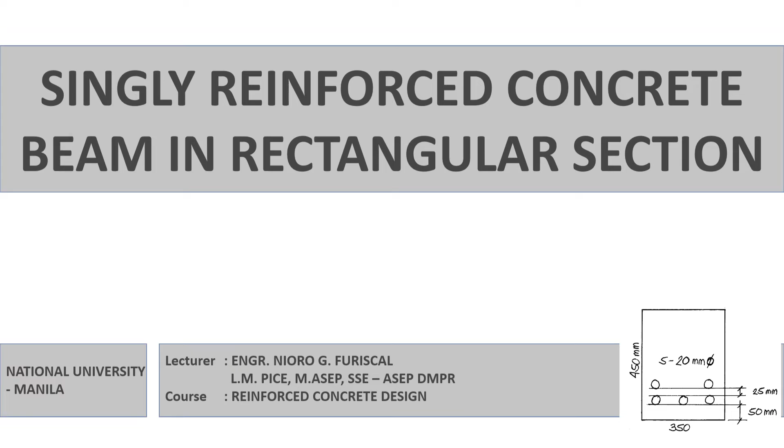Okay, so this time we will try to apply all of the codes that were discussed before this video lecture, regarding the singly reinforced concrete beam. Today we are going to demonstrate how to apply those pertinent codes in a rectangular section. Okay, so let's get ready.

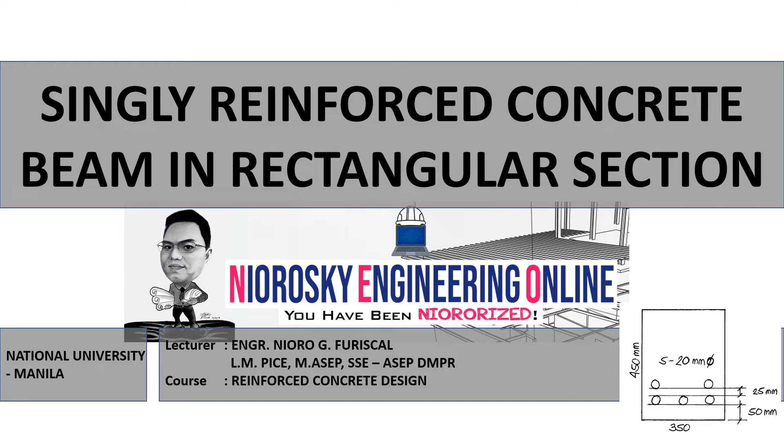So here is a given. We have a beam width, let's say B is 350 mm. And then we have 450 mm to be our H or total height. Notice that the gap between two layers of reinforcement is 25 mm.

Next time around as I discuss this, I'll try to introduce the code behind why I decided to use 25 mm, because there is a minimum requirement. But for the meantime, let us appreciate that it is given.

Now, also, the distance between the rebar up to the nearest surface of the concrete, free from reinforcement, is what you call concrete cover. So the concrete cover used is 50 mm.

So why is it called concrete cover? Because it's free from rebar, so that distance is the concrete cover. So when we say CC, it means concrete cover, or you can call it clear cover.

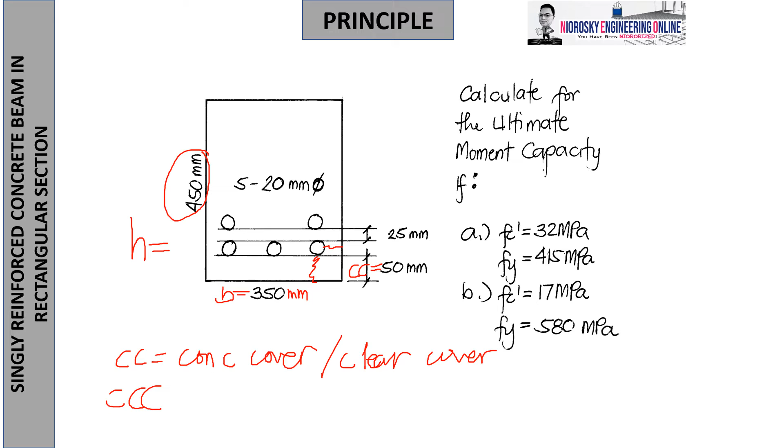Okay, now we are to find the ultimate moment capacity. That's the question. If, let's say, letter A, we have this set of FC prime and Fy. And letter B, what if FC prime and Fy is given differently here?

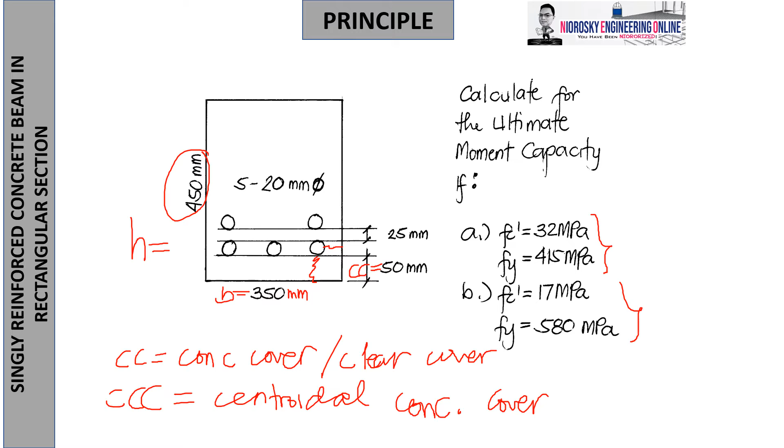Okay, so based on what we discussed in the code before, let's compute what we call beta sub 1, which is dependent on FC prime. Recall that beta sub 1 is dependent on your FC prime. If that exceeds 28, then you have to calculate it.

Just like what happened in letter A, the formula goes like this. I think the viewers or learners should review the video lecture that I prepared before this discussion, including flexural analysis of reinforced concrete beam as well as the reduction factor calculation under flexure. Therefore, we will arrive at this formula.

Since FC prime for letter A is 32 megapascal, meaning you are above 28, the code says to use this formula. So supplying it, you will get beta sub 1 of 23 over 28.

As much as possible, beta sub 1 should be interpreted as a fraction first, so as to preserve what we call accuracy and precision of the calculation. Much better is the accuracy.

So therefore, when our FC prime is 17 megapascal, since it does not exceed 28 as the code suggests and recommends, beta 1 should be 0.85 immediately. Okay, so it is under the code already discussed in the past video lecture.

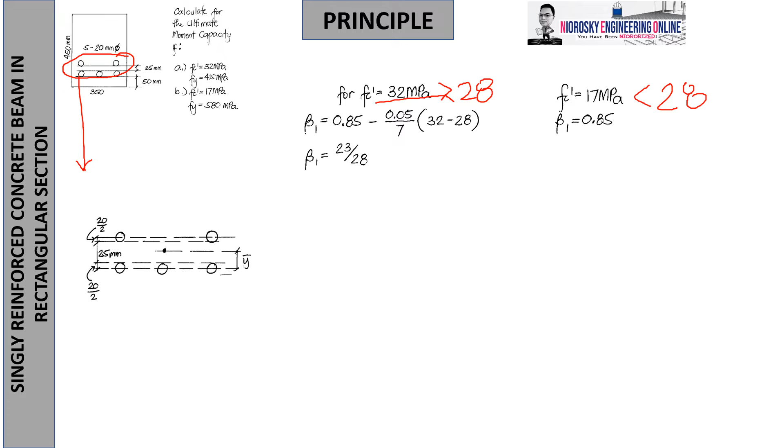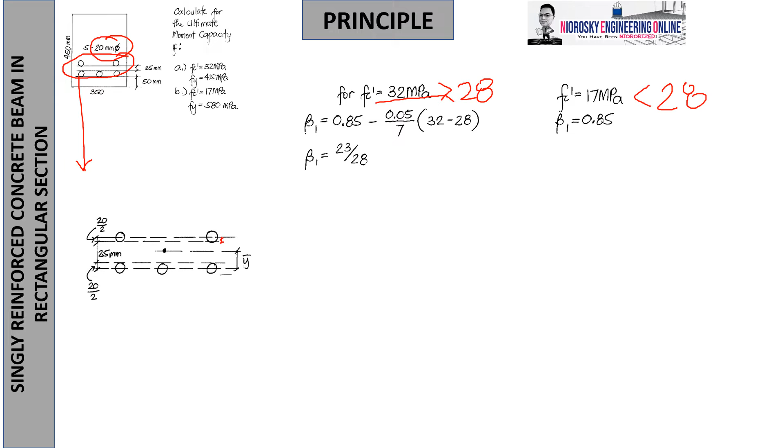And if you notice, since it's halved, the size is 20 mm as noted. So therefore, there's a remaining radius of 20/2 on both sides since the bars are paired. What's the reason we need to do that? It's because we need to find this bar Y. I trace bar Y based on the center of the last layer of the rebar, for simplicity.

We are used to taking the centroid at the very bottom. So I take advantage of this, so that when we later take the algebraic difference, it's easy to subtract to get the effective depth D. My main objective here is to find bar Y.

Then if I take the componential, it equals the resultant. So take note, this is the resultant, and this is the componential. Learn from your statics, that's what you're going to do right now.

So take the moment of the centroid location up to the red line, which is what we checked. That's where we put everything to get bar Y. So AS times bar Y as a resultant equals the 2 pieces of bars which have a distance going here, that is a distance of 20/2 plus 25 plus 20/2. It's easy to understand.

Plus the 3 pieces which are hit at the center, so there is no distance, because that's the very center. So that's the advantage of why I centered it there. That's very good logic.

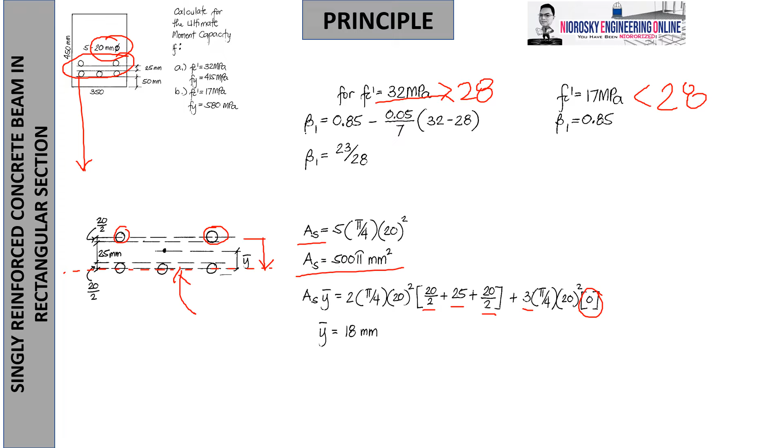And then you will find out that you will get bar Y of 18 mm. So how do we use this bar Y?

Now notice that if we take the algebraic difference, drawing it out here - these are the bars. We got the center of this, and this is bar Y. The distance D is from the rebar center up to the effective extreme concrete fiber under compression, which is the effective distance D as discussed already before.

So therefore, notice that we have a concrete cover of 50 mm as provided, and there is the remaining half of the bar size of the last layer reinforcement, which is 20/2 by 20/2. The diameter of the bar is 20 mm.

So for me to get D, since I have H, D is equal to H minus concrete cover minus bar size over 2, minus bar Y. Taken algebraically, I will get 372 mm.

Also, don't forget there's another code we mentioned before, that D is equal to D sub t, and there's a case where D is not equal to D sub t. When does that become equal? When you have what's called a single layer reinforcement. So let me write this clearly: for single layered reinforcement, D equals D sub t. When it's not equal to D sub t, that is the multiple layer case.

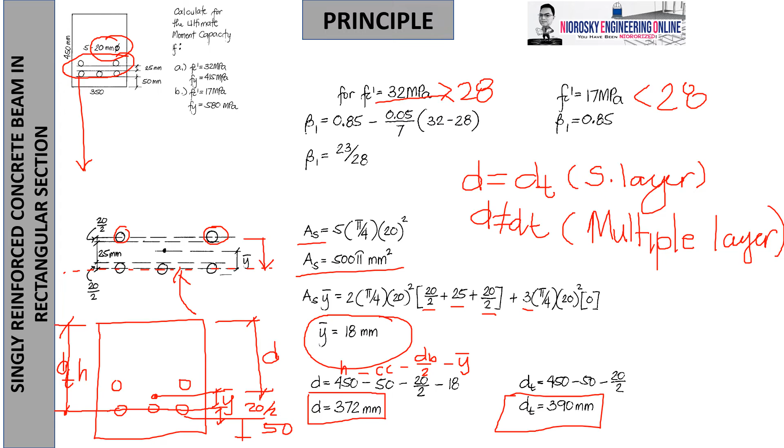Now let's start with condition A, where FC prime is 32 and FY is 415. Take note of these values, we took them from our calculation earlier so we don't forget when to use them.

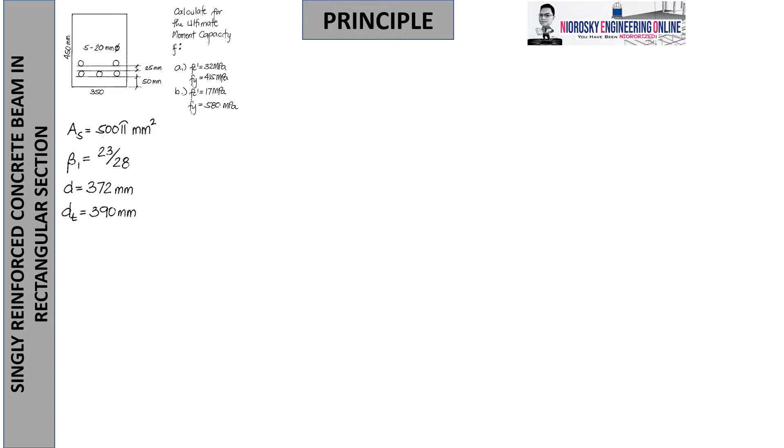So our main objective is to calculate what is A or what is C, either of the two. Note that A is a function of beta 1 times C - don't forget this, this was also already discussed before in our previous video lecture.

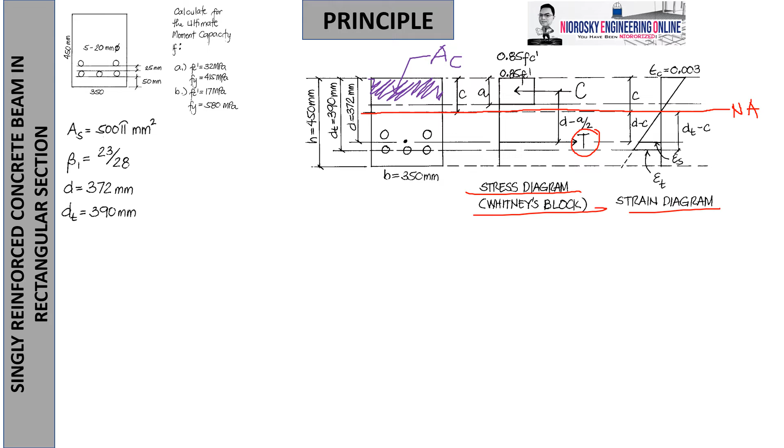Now let me continue, so in continuation, how do we assess this? We already proved before that C is equal to T. That is always the case.

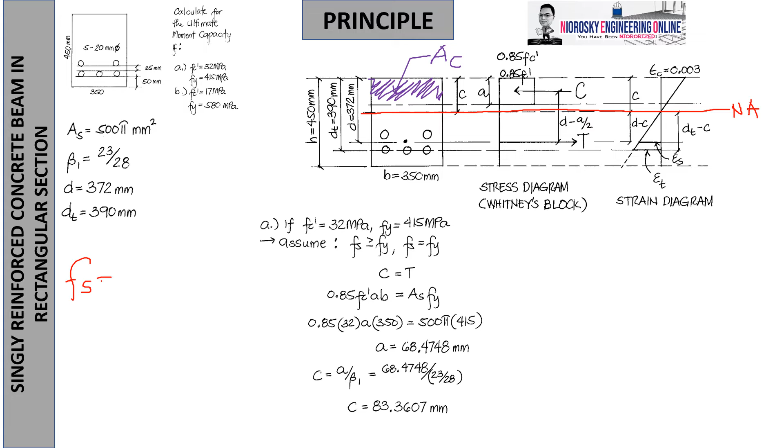Okay, let us start first with an assumption. Don't forget that there are three cases that exist for rebar: when Fs equal to Fy, when Fs is more than Fy, and when Fs is less than Fy.

When Fs equal to Fy, we are talking about a terminology we call balance. When we say balance, it means the steel and the concrete yield at the same time.

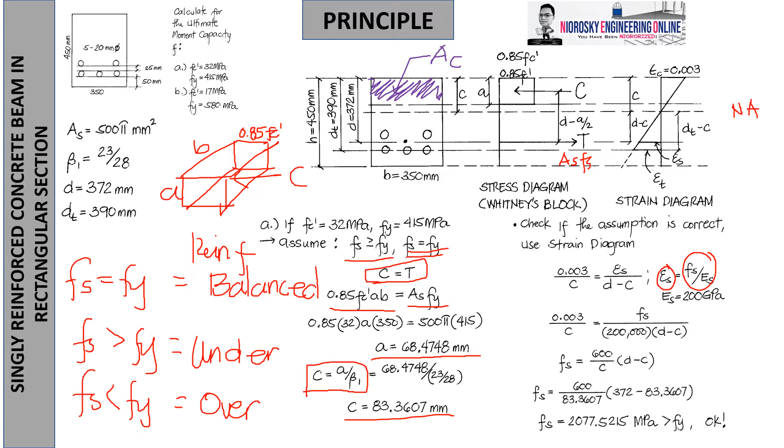That's the only solution there, so that's why we arrive at this. And note that ES, the strain of the steel, equals Fs over ES, where the modulus of the steel is 200 gigapascal, already stated by the code.

So rearranging the equation, noting that 200,000 times 0.003, by algebra you will get Fs equal to 600 over C times D minus C. This boxed formula is very important - don't forget it. Later we are going to use that also.

Now, supplying all the values, D as 372 and C as 83.3607, you will know that the steel strength or steel stress is 2077.5215. That is more than Fy of 415 as specified in letter A. So therefore, this is okay.

Since we assume that if Fs is more than or equal to Fy, then it's automatically correct that Fs is equal to Fy. So once you exceed the yielding strength of the steel, the steel strength is already the yield strength. If that is less than, then that is not Fy because there's an actual Fs that is less than Fy. So in letter A, it is under-reinforced, since Fs is more than Fy.

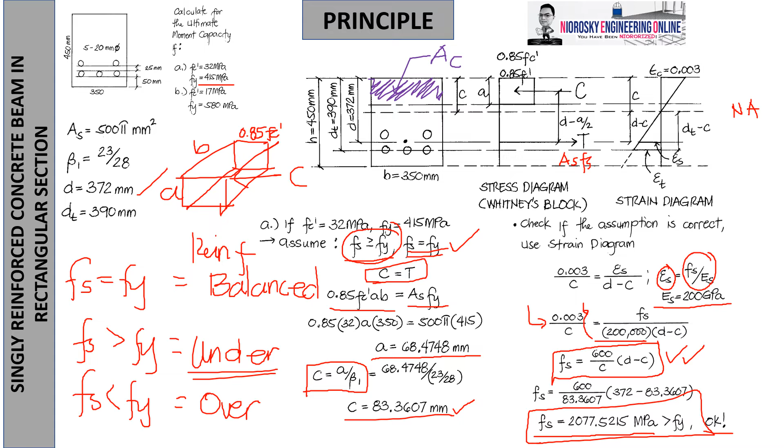So what's next? Let us find the nominal moment. So we place the value here.

For us to get that, as discussed before, ultimate strength or ultimate moment is equal to reduction factor phi for flexure times the nominal moment. The phi should be taken from the relation of E sub T, the maximum tensile strain. Now, using the same correlation as before with E sub S, relate E sub T with the function of D sub T minus C equals 0.003 over C.

So this will be the proper correlation upon algebraic manipulation. You will get E sub T equals 0.003 over C times quantity D sub T minus C. Supplying all values, E sub T is 0.01104. Comparing this to 0.005, that is more than 0.005. Automatically, we have a tension-controlled limit.

If you recall in my past video lecture, under the topic of reduction factor for flexure calculation, then it's automatic that phi is 0.9. So then we are now going to calculate the nominal moment.

But where do we get that nominal moment? The nominal moment should be taken from the Whitney's stress block diagram. So what you can do, there's a moment that will exist.

If you try to take a look, if I try to hold this particular moment at T, then C will rotate. If I particularly hold C, then T will rotate. There's a couple that will happen. That's a couple, or a pair of forces opposite in direction, with a perpendicularity between both.

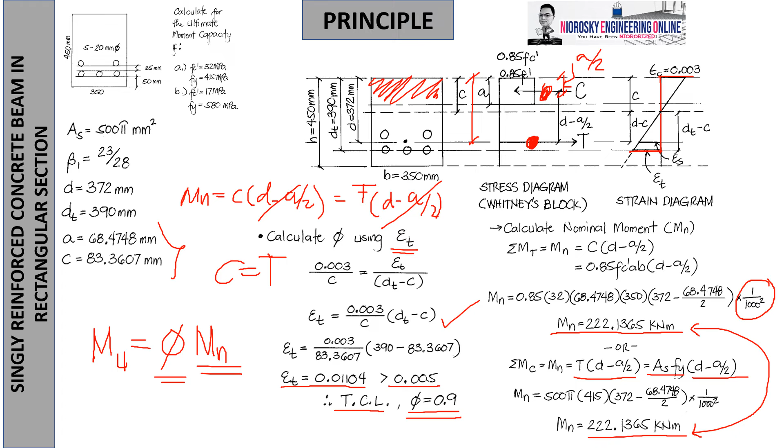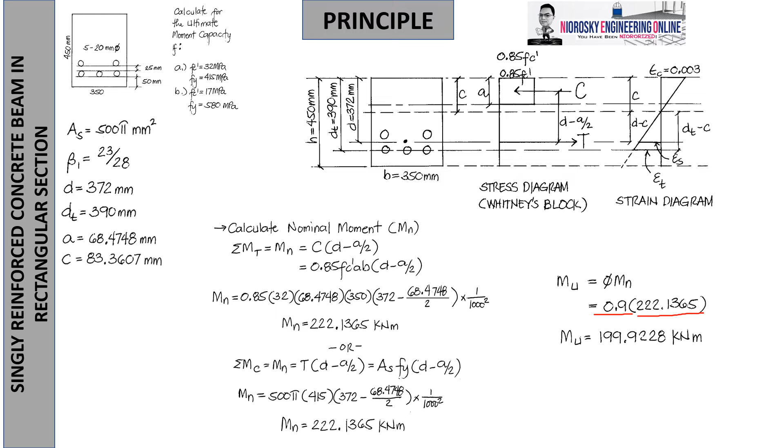Now calculating for the nominal moment, here's what will happen. By multiplying 0.9 as we obtained earlier by the nominal moment, we will have Mu of 199.9228 as the answer for letter A. So notice that if FC prime is 32 megapascal and Fy is 415 megapascal, you will have 199.9228 kilonewton meter of capacity to resist load under ultimate strength design.

So what will happen if I change it to the parameters of letter B? FC prime is changed from 32 into 17, and Fy to 580. Let's find out.